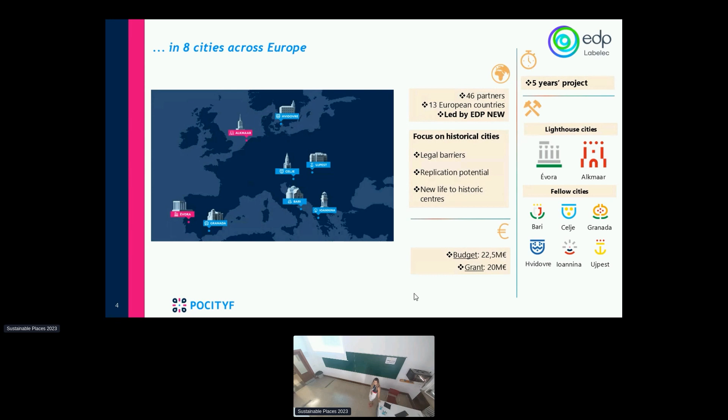So we focus on historical cities. We have legal barriers to overcome. Replication potential is our goal - we want everything we're doing in the project to continue after the project ends, and we want to improve the lifestyle of the citizens who live in these cities.

We have 5 different aspects: political, urbanistic, social, technological, and economic. Why political? Because we have a lot of legislation protecting the cities we work on, and we have to have a direct connection with the municipalities and with the laws, and we had a lot of discussions about the solutions we wanted to implement.

In the previous presentation I did this morning, I talked about building integrated photovoltaics, one of our main solutions - I didn't repeat that content here, but it's recorded if you want to see it. The community solar farm and building integrated photovoltaics are the 2 innovative elements in the project that will allow us to achieve positivity in these regions.

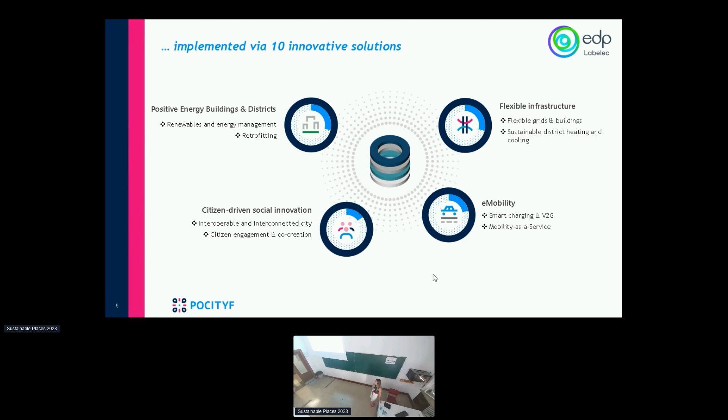We have all the solutions divided into 4 energy transition tracks. The first is positive energy buildings and districts, with home energy management systems, energy routers, smart inverters. We have flexible infrastructure, and we are testing the installation of second life batteries. There's citizen-driven social innovation through workshops - we organize workshops in Portugal and across Europe to make students aware of the problems we are facing now. And we have e-mobility through the installation of EV charging.

I will start with Évora, one of our lighthouse cities. Évora is a protected city with around 50,000 inhabitants, and it's the only Portuguese city that is a member of the oldest European city network. The historical center doesn't even allow citizens to install PV panels on their houses - that's why we want to implement a community solar farm outside the city, to decrease the disadvantage for someone living in the city center compared to others.

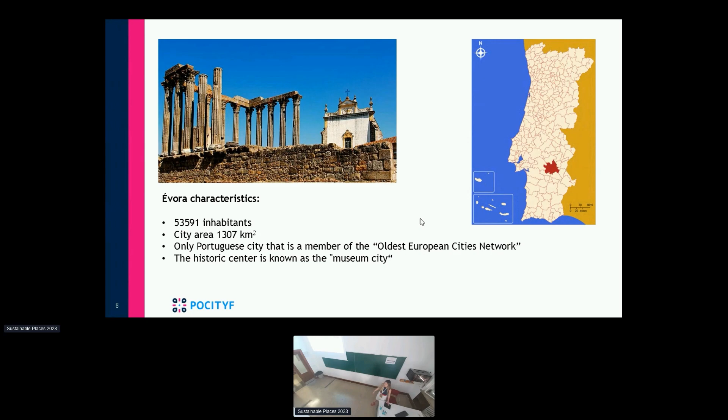We have 3 different paths, 3 different regions where we want to be positive: the city center, a rural area called Valverde, and the industrial park. In the city center, I think it's the most interesting path, and I believe the main takeaways of the project will come from this path because it's where we actually have the restrictions.

In Valverde, it's really easy in a way to implement an energy community because it's really small, all the houses are close to each other. In Portuguese legislation, there's a rule that says all houses inside the community need to be at a maximum distance of 2 kilometers, and this area, all the houses are inside that area, so it's easy in a way.

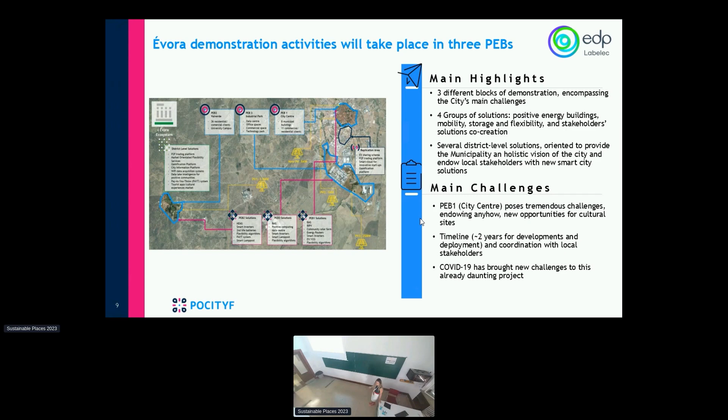In an industrial park, we have other challenges because we have companies with high production, so when we are talking about establishing energy communities, even though we are implementing a PV park in each one of those, we don't know yet if we will have a surplus of energy to exchange between the buildings. So this is the Évora pilot.

Now I will show some particular solutions that we are developing in the project. Home energy management systems are being developed by INESC TEC, a partner of the consortium, and this will allow data acquisition when connected to smart meters, and also a mobile app to allow citizens to visualize their data and be more aware of what they are consuming and producing.

These systems will be implemented in the 11 clients we have in the city center. These clients have PV panels because they installed before the legislation came out. So at the moment, a person who buys a house in the city center can no longer implement PV panels, but these ones were lucky because at that time they didn't have that restriction, so they are inside the project as well.

The pay-as-you-throw solution is being developed by a partner called Ubiwhere. This aims to change the behavior of the people. Nowadays in Portugal, we pay a tariff connected to waste that's included in the water tariff.

We are trying to install containers in the city center. Citizens will have a card and they will throw the waste there, so it's a way of making them, or forcing them, to recycle and decrease the amount of waste. They can gain points because of that, and in an optimal condition, they just pay for what they put in the containers. I think it's pretty interesting, and it has a lot of opportunities for gamification.

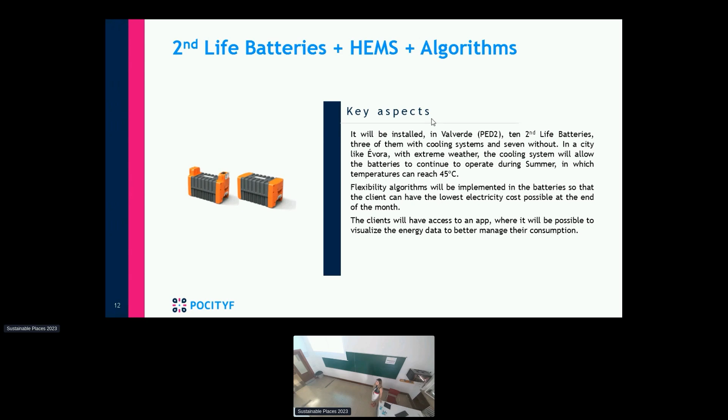The Tourist Mobile App is being developed by a partner called Uninova from Lisbon, and this will engage with tourists, making optimal routes for them to save time and visit the most interesting points in the city. This optimization will be based on the distance from one place to another, and also the time of the visits, so it can be as efficient as possible.

This will also be included in the gamification platform we are developing, so tourists can gain points and buy souvenirs from local stores in Évora. I think it's pretty interesting as well.

The second lighthouse city we have is Alkmaar in the Netherlands. Alkmaar is a little bit bigger than Évora, with approximately double the inhabitants, but it's much smaller. They are known for being sustainable, like the Netherlands as a whole is known for the projects they have. They have 17 provincial monuments, about 400 national monuments, 1,000 municipal monuments, and 32 windmills.

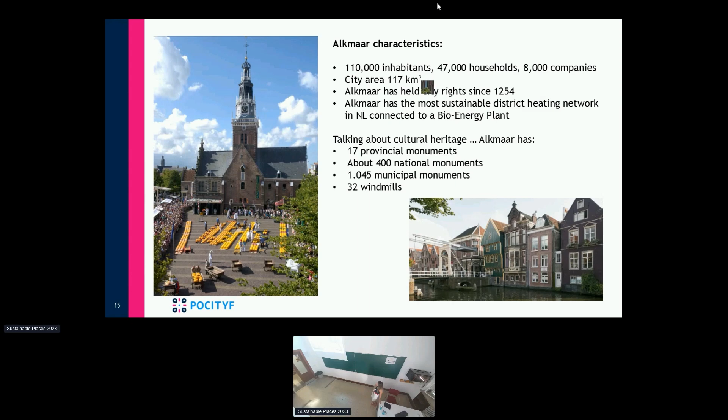So this is the picture of Alkmaar. They have 5 Pocityf energy blocks — I won't say the names because I don't know how to pronounce them in Dutch — but basically they are aiming to reach positivity as well in each of these 5 blocks, and they will show about 50 innovative elements. Most of them are really similar to Évora.

But actually, for example, the peer-to-peer solution I was talking about — we discovered that Alkmaar is having a lot of trouble implementing peer-to-peer because they have a net metering scheme, so they don't have any incentive to exchange electricity between houses.

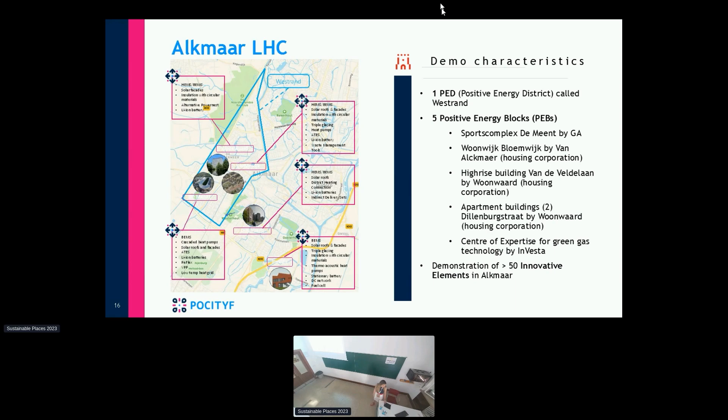So that's one of the solutions that I think we only showed in the Évora pilot. So De Meent is a sport complex that they have. They have a gym inside, an ice rink, and a really high energy consumption.

Before the Pocityf project, they already installed a lot of solar panels. With the project, they are hoping to change natural gas for heating with renewable sources. They want to increase renewable energy production, and they are changing the thermal energy system all over the building.

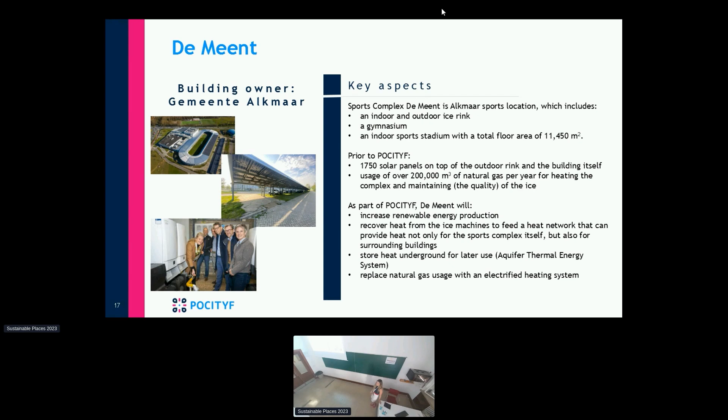with solar PV production. Alkmaar has not been visited yet, so the project started in 2019, and hopefully in September we will have a general assembly, and we will be able to see all of these solutions on the ground already. They have other non-building related innovative elements like the smart lamp posts.

They can use that for boats or for electrical vehicles. They have a noise barrier that actually has PV modules, so it's a solution with a double function. And they also are trying to implement hydrogen vehicles, I think mainly for buses.

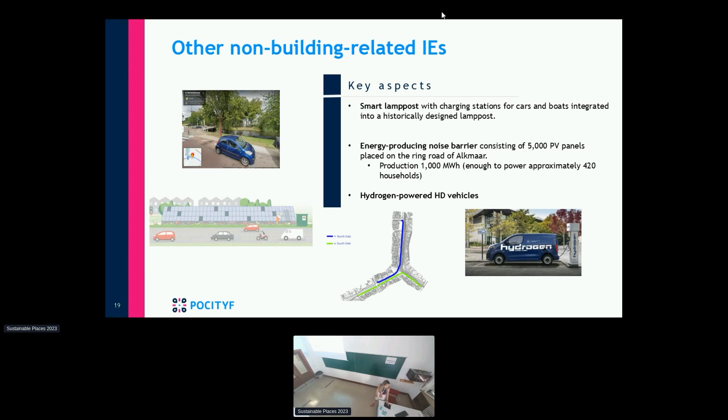This is a quote that the site manager from Alkmaar showed in the General Assembly. I thought it was really funny: there is no negative energy that resists positive people, because we try to be positive as well, working in the Pocityf project. So this is all from my side. Thank you very much. I don't know if you have any questions.

How do you manage to, I don't know if it's implemented already, but how do you think you can manage people to throw the waste in the bin and not just in front of the bin?

We are kind of forcing them because we are taking the others from there. But you could leave it just in front, so we are trying to trust people in that regard as well, because we believe that the people we are engaging want really to be part of the project. So your question is, how do we know if they are going to the smart bin or to the normal bin? In reality we don't know, but we are trying to choose the right people to be part of the project.

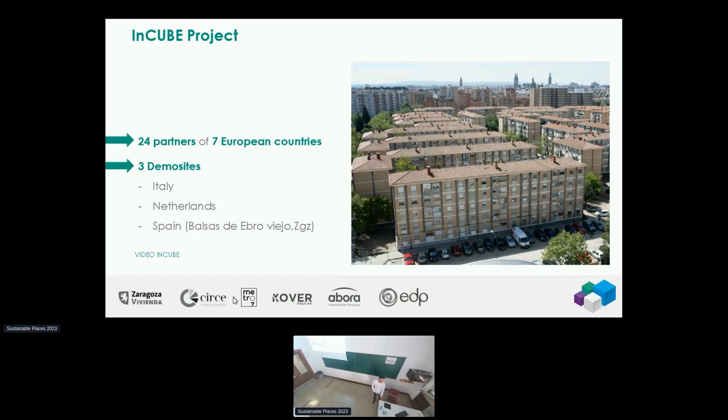We have some social networks and a website that you could visit in order to see how we are going in the project. And well, regarding the point we are at in this commitment of the inhabitants, we had the startup meeting in March, and we achieved some milestones.

For example, we ordered the technical documentation. We made agreements regarding the solution of the elevator, because as you could see before, the buildings are really old and don't have any accessibility measures for the inhabitants, who are also elderly people. So we are also working with the follow-up commission, sharing with them the progress of the project and compiling the documents for requesting some Next Generation funds.

So here you can see that we have done some follow-up commissions in order to have direct contact between neighborhoods and technicians. We select neighborhood representatives of the blocks to have a teamwork compilation of their suggestions and preferences in the buildings, which are later explained in detail to the rest of the neighborhood.

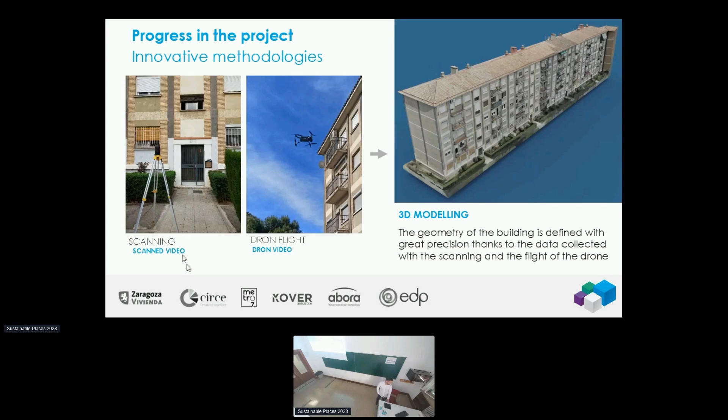Then when we go to the rehabilitation proposals, we have three main points. But right now I'm going to focus on the improvement of energy efficiency and also the improvement of accessibility, because it's part of the energy use of the district. I'm not going to center on the conservation improvement that can be made in the district as well.

So then we show them the new solution for the lift. We fold down the existing stair and develop a new block outside of the facade, with a stair line that has direct access to the buildings.

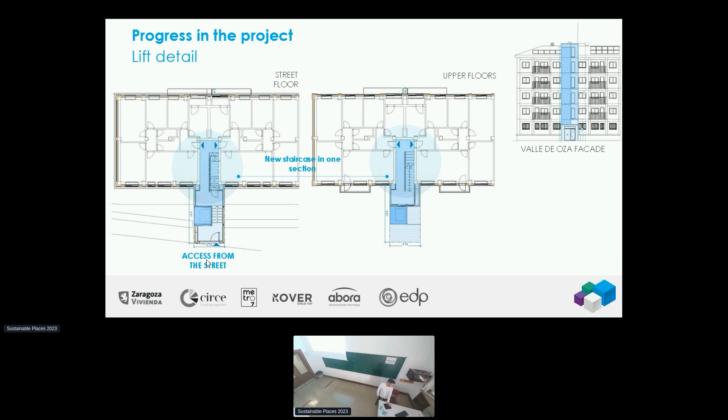Then we showed them some of the renders we have done in order to achieve their aesthetical requirements and decisions, because they have different decisions to make on the way we should carry out the rehabilitation works.

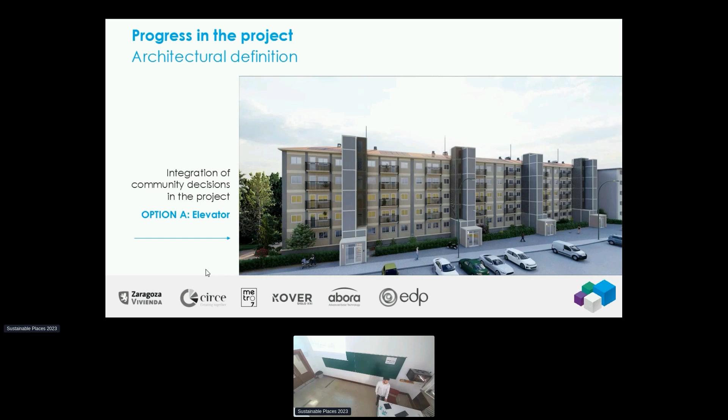So, as a next step, we have the presentation of the basic project to the Zaragoza City Council. Here we are going to review all the project in order to have their approval and to ensure the project complies with municipal regulations.

And also during summer, we're going to start with the monitoring of the existing stage to have future results, to compare how much the energy consumption has been reduced during this time. And by the end of summer, we expect to have the execution project ready to be executed.

So as for the elements we are applying to the building, first we have the prefab module facade. We wanted to show the inhabitants that we are not changing the aesthetic of the building, and we are trying to continue with the materiality and the original compositional lines that are part of the building. This is also a requirement from the city council, so we are aligned with that.

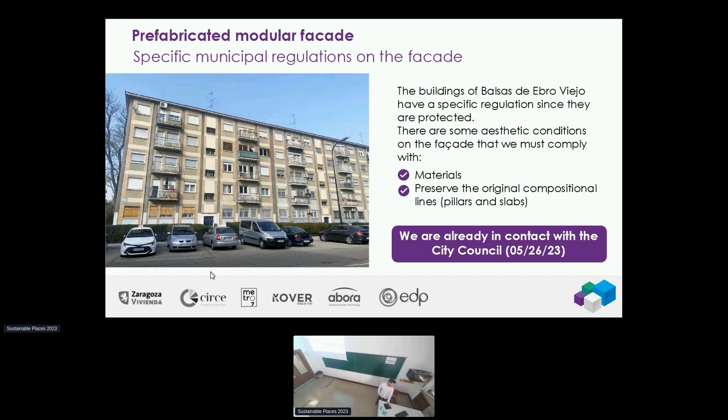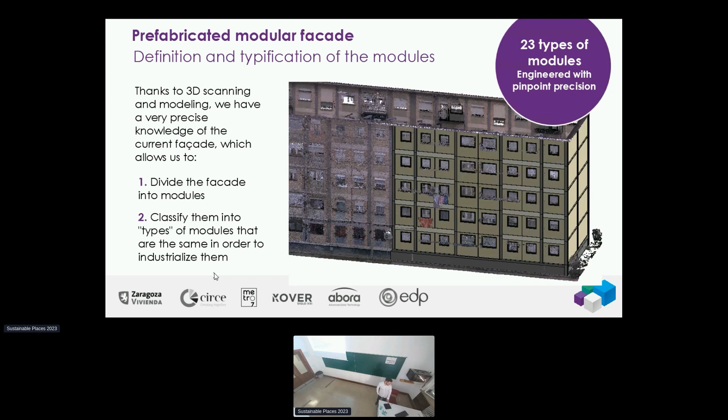And we also explained to them how the 3D scanning leads us to the correct development of the prefab elements and the different types being modeled with millimetric precision.

So then we showed them the different finishings, where the insulation has the best quality and is really an innovative product that is going to be really important for them, and also some prototypes that we have applied in the project.

Finally, in terms of the renewable energy solution, that's the one most important for us. We show them the electrical scheme of the dwellings: how 70% of the total number of panels is going to be photovoltaic, while 30% are going to be hybrid, combining electricity and domestic hot water. Then the electricity is going to be sent to the elevator and also to self-consumption of the homes, while the domestic hot water is going to be collected in a deposit and distributed equally to all homes.

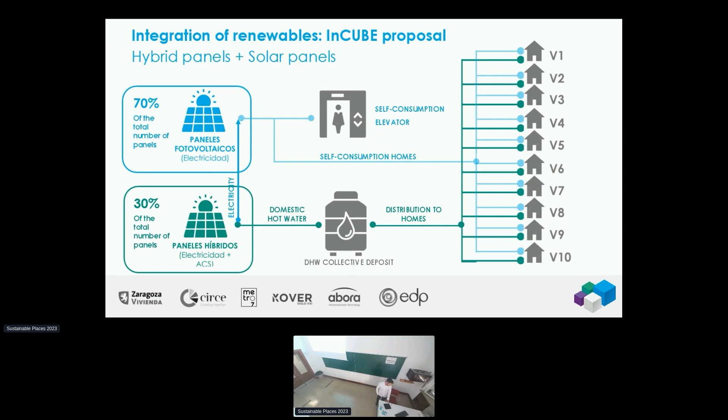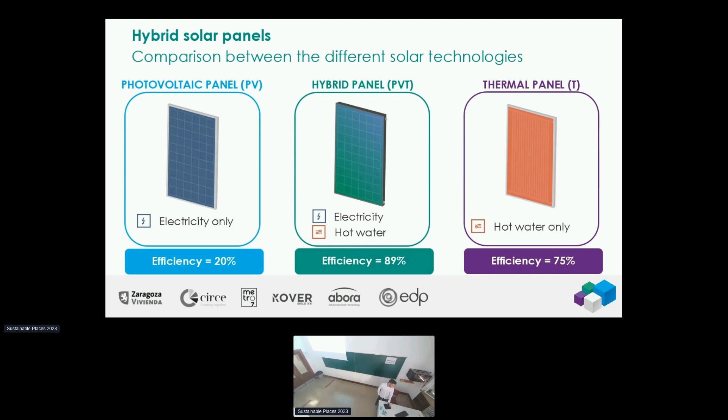So about the hybrid solar panel solution, they were really aware of it. We need to show them the differences between different types of panels, and what is the best efficiency model that is already in the market. It was really important to them to show these ratios because they were looking for the best production, of course.

And also some key benefits of these panels, like the double production, this premium quality that is made in Spain, so they were really happy with it. Also the greater savings and the less CO2 emissions in the production of them.

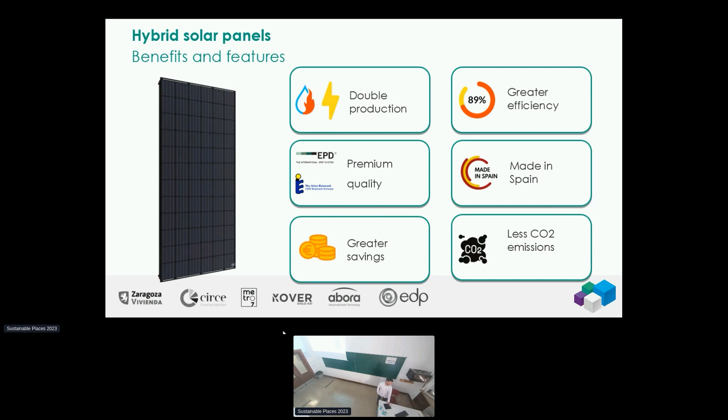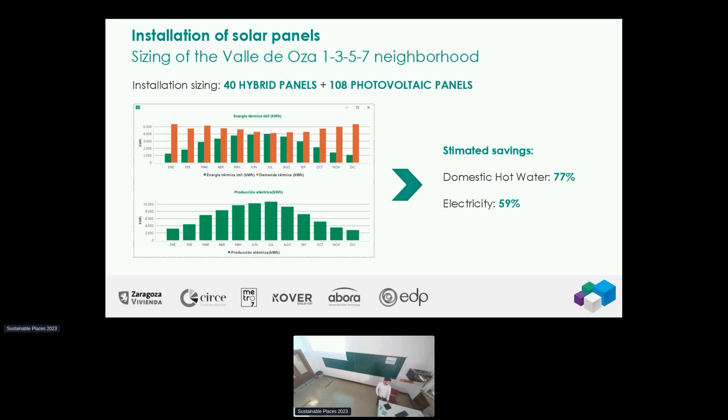But this is not really relevant unless you speak with them about the savings. So with this study, we expect to address a 77% reduction in domestic hot water consumption, and also about 59% in electricity.

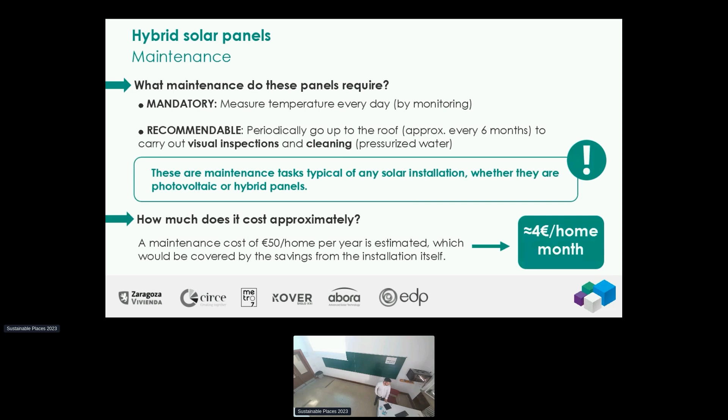In terms of maintenance, the temperature is measured every day, and it's also recommendable to go up to the roof and carry out visual inspection and cleaning. But it doesn't cost too much, about 4 euros per home a month.

So with it, we passed through the energy community. First of all, they didn't know exactly what an energy community was, so we needed to explain in a brief, simple way what it is, and that its objective is the benefit gained from a single solar energy generation installation.

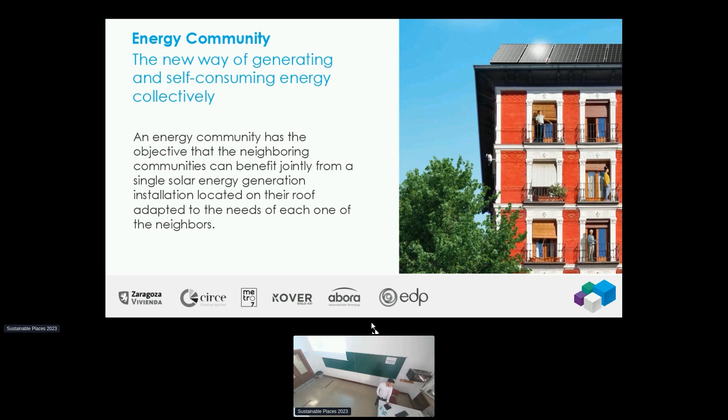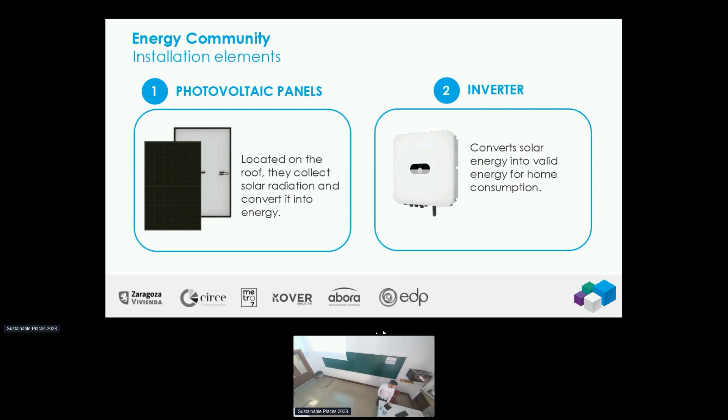Which are the elements that compose this installation: the photovoltaic panels and also the inverter. And then, what is the process with this consumption, from the energy capture to the self consumption, the disposal of surpluses, and then if it's not enough, we have the network energy consumption.

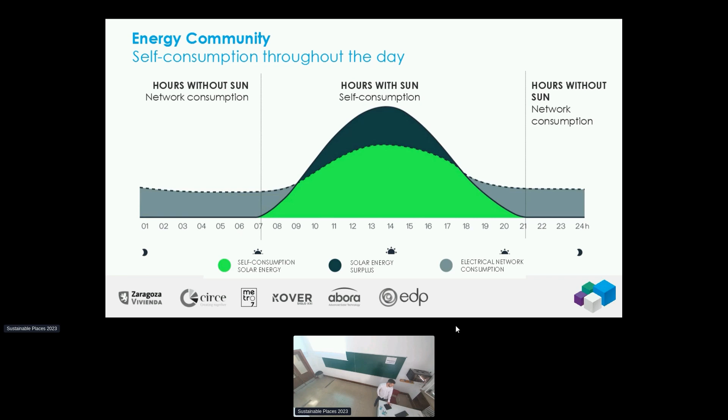This was really relevant for them, because they need to know what happens with the production when there is no sun. So we gave them this graphic where they could see that in the hours of sun they consume less than they produce, so they will benefit from them. And also in the hours without sun, they are going to consume from the network.

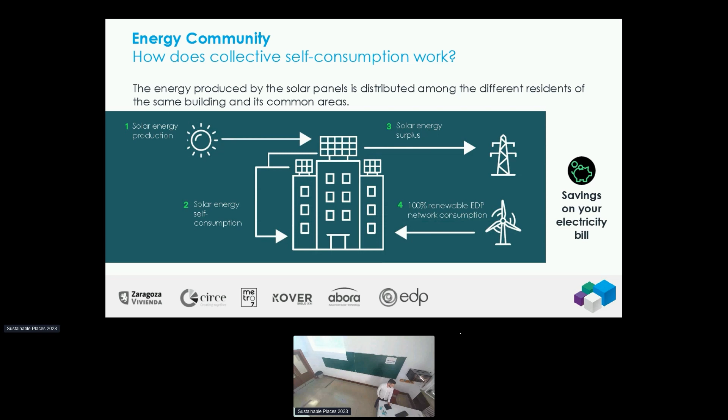Again, a simple schematic of the installation, and then we need to explain that this, for example, this elevator that's going to be applied in the building is not going to cost more maintenance for the inhabitants. So all the priority is given to this elevator consumption.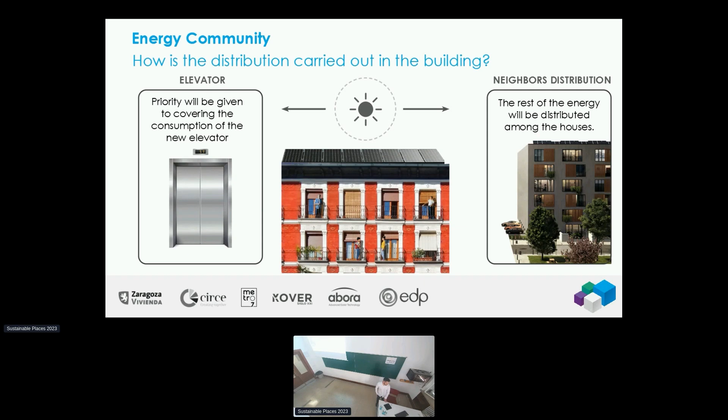And then the rest of the energy is distributed equally to all the houses, again with a schematic of this production. And then we need to say that...

They have the same percentage of the production, but the savings are not going to be the same because they have different circumstances. For example, the type of consumption, the individual heating and water system that they have in each house, and also the price at which each home pays for electricity, which is based on specific contracts.

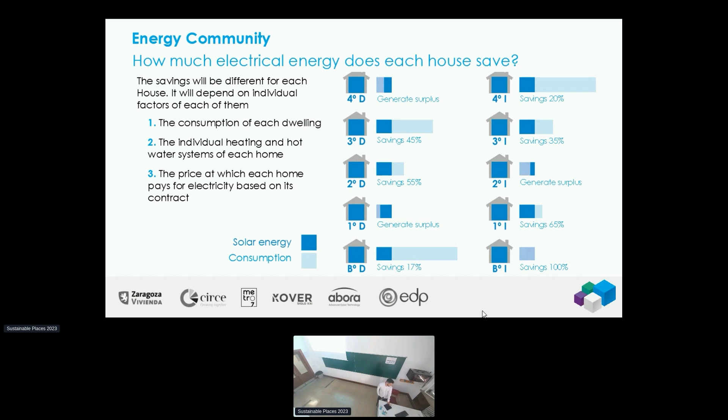So, for example, some portals will have surpluses, while others have less savings. Just as a conclusion, all the homes receive the same contribution, but the savings will be different, to be clear.

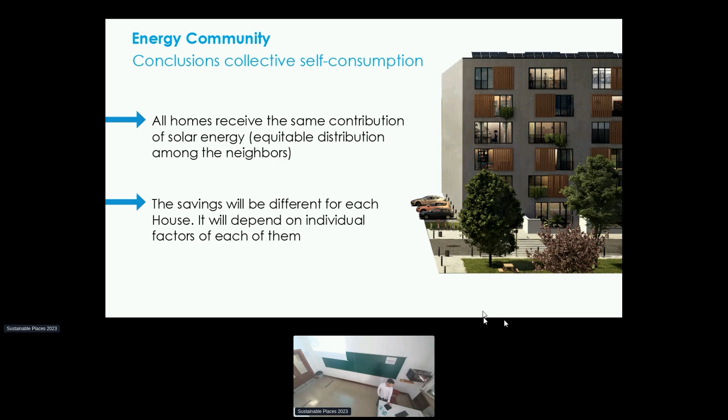And then we left the floor to the bill, where we could see how this production is going to be compensated in the electricity bill, and how the surpluses are going to be applied.

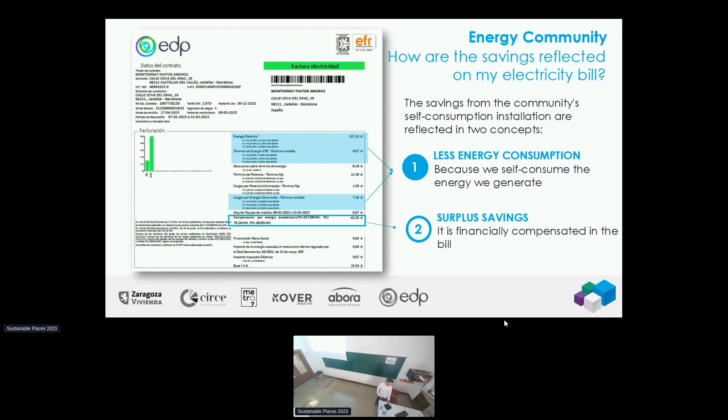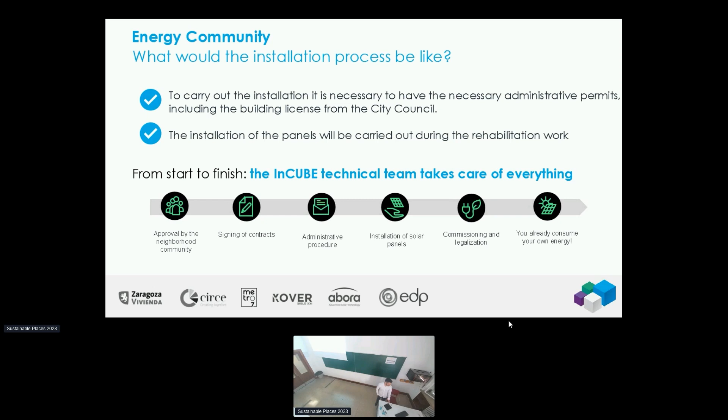Finally, we go through the process of installation, taking care of everything from start to finish, so they don't need to worry about anything. The INCUBE team will take care from the approval to the signing, administrative, installation, commissioning, and consumption.

Finally, we finish with some frequently asked questions that were really relevant in other follow-up commissions and stuff like that. And with it, we concluded their achievement, and we are going to develop this energy community in the near future. So thank you, everyone.

With the drones coming, you mentioned you made a model - was it a big model or just an image? No, a BIM model. We transferred this scan to a BIM model by a verification process. We started with it as a point cloud, and then we developed the 3D model.

Thank you, Danny. We can continue with another European project, a real project we are developing in 2 lighthouses, in Dijon and Turku cities. My colleague Eva will tell us a resume about the different innovations and the progress of the project. Please, Eva.

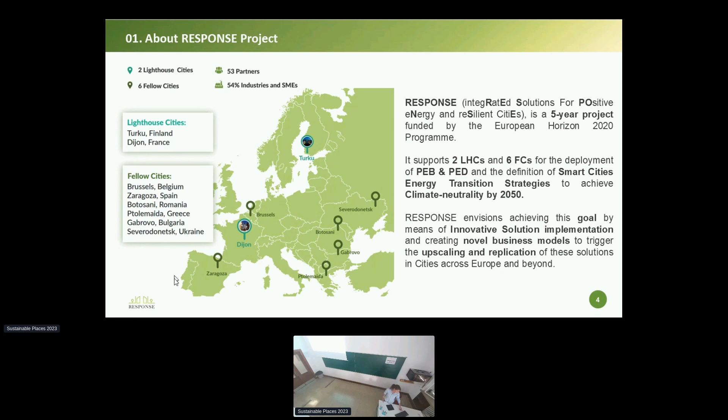The energy transition strategy the project proposes lies in 5 main pillars, or so-called transformation axes, shown in dark blue. These consist of 10 integrated solutions, and these 10 integrated solutions are composed of 93 innovative elements - different technologies, tools, and methods.

During the project, these elements have to be implemented in the lighthouse cities, in the different positive energy districts, and they also have to be measured, monitored, and evaluated by means of specific key performance indicators defined within the project as well.

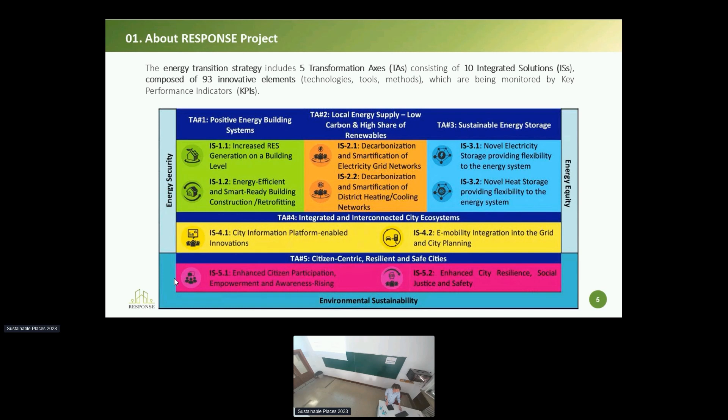So what about the lighthouse cities and the integrated solutions they have to implement throughout the project? As I commented, the two lighthouse cities are Dijon in France and Turku. The main objectives of these cities within the project are to significantly improve local renewable energy penetration, energy savings, reduction of emissions, and the demonstration of smart city solutions, promoting these solutions all over Europe or in other areas of the cities.

More specifically, what Dijon expects from the project: the city wants to create one positive energy district with 10 positive energy buildings and 6 positive car parks. They want to create smart city platforms based on digital technology to accelerate the energy transition, involve citizens to be committed to the goal of the project, and of course achieve the goal of carbon neutrality by 2050.

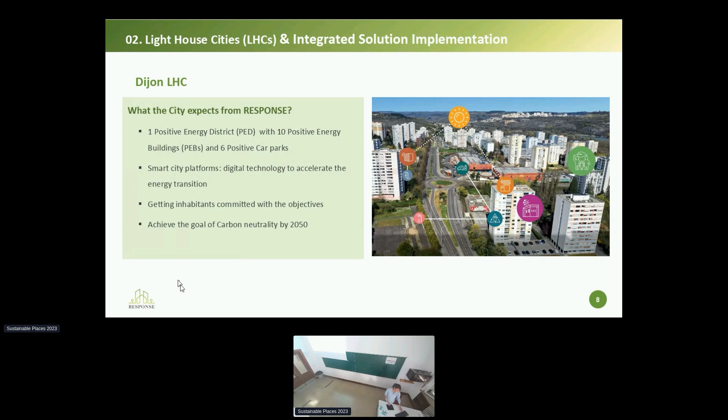Very similar in the case of Turku. They want to create one positive energy district with 5 positive energy buildings, increase the partnership between all the stakeholders, increase awareness of sustainable energy production and consumption, promote local replication in other areas of the city, and achieve the goal of carbon neutrality by 2050.

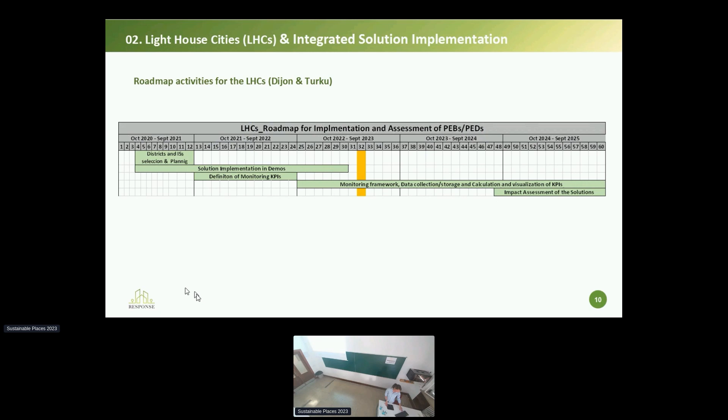Here is the timetable with the progress of the main activities these lighthouse cities have to conduct throughout the project. As you can see, we are right now halfway through the project, so some activities are finished, but others are in progress or not even started. I'll give you an update on the progress of these different activities.

Regarding the first activity, both cities have already defined or selected the most promising district to implement all the solutions.

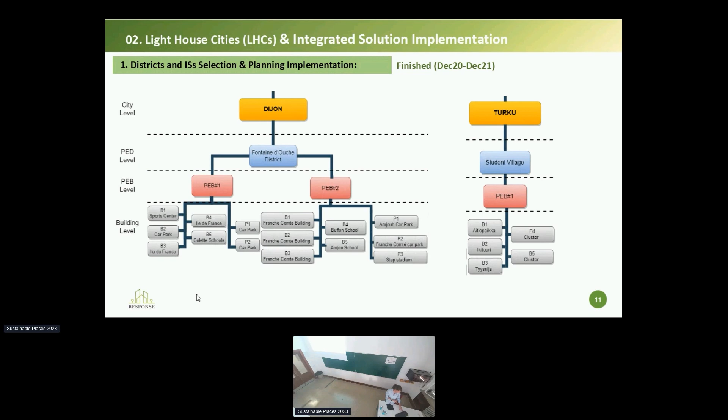In case of Dijon and Turku, this activity is finished, and the cities have also defined or selected the different innovative elements they want to implement in this demo within each one of the 5 transformation axes and innovative solutions.

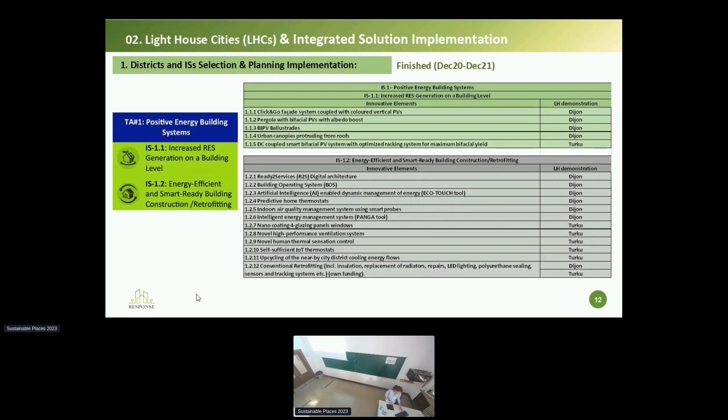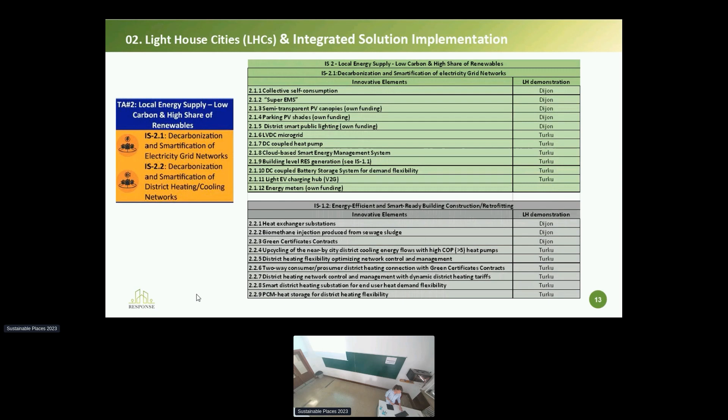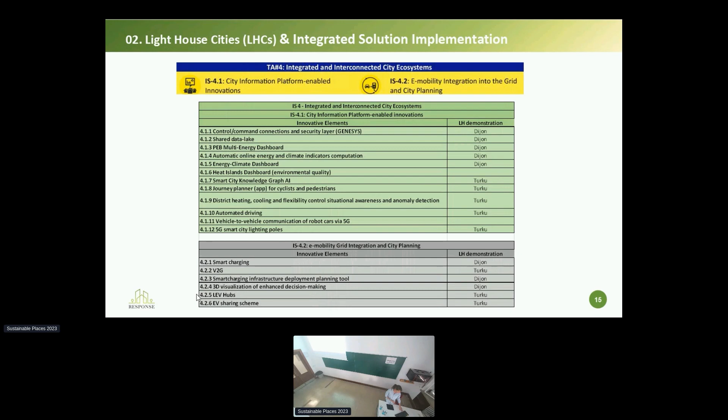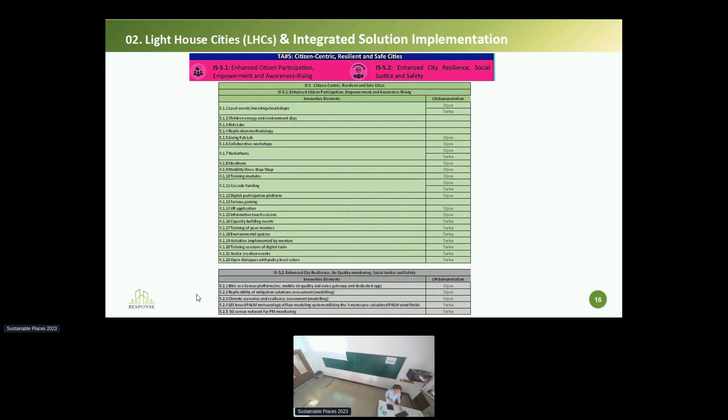Here you have the related ones about increasing the positive energy building systems, the ones related to improve the decarbonization of the local energy supply and improve the smartification of the grids, the ones promoting novel storage energy to provide flexibility in the energy systems, the ones related to the integration and interconnection, the creation of city information platforms or integration of electric mobility in the grid in the city, and finally the ones for promoting citizen participation and engagement, and the ones related to ensure city resilience, social justice, and safety.

So once the city has defined or selected the demo sites and the innovative elements interesting for being implemented, the next step is the implementation itself. This activity is almost finished. They are right now refining some installations, some things, but most of them are finished.

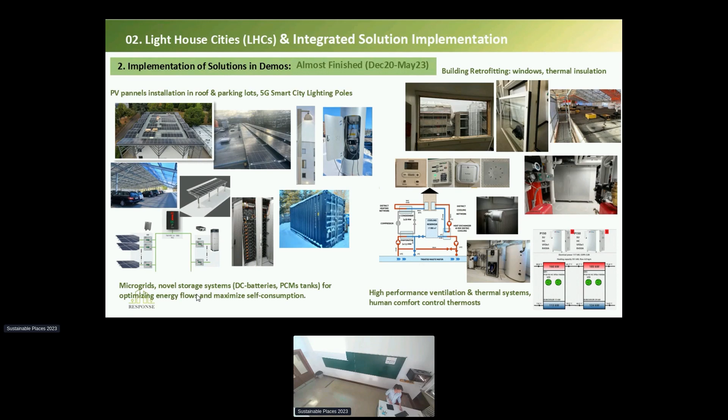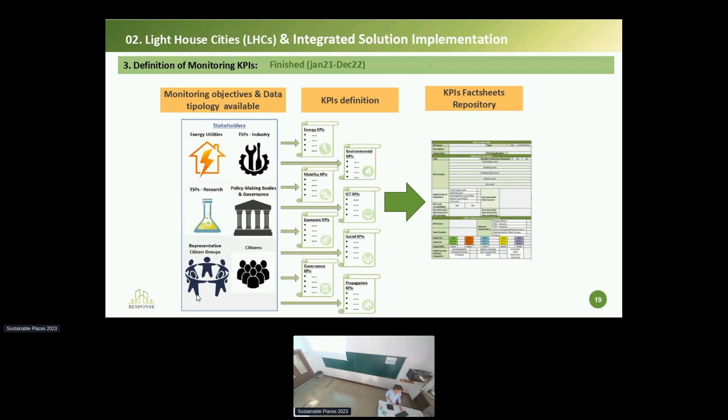And another activity finished, which has been done in parallel, is the definition of the more suitable KPIs, key performance indicators, to measure all the monitoring upcoming from this solution, to perform the achievements or the performance of this solution throughout the project. So based on the objectives of the monitoring and the kind of data available from this upcoming monitoring, these KPIs were defined, and also different fact sheets with all the information about how to calculate them, or the information required, and so on.

And the rest of the activities are still pending to be finished or to be started. For instance, the stage for conducting all the monitoring activities, creating all the framework for the collection of all the data from the different buildings or devices, establish all the calculation required for the KPIs, and the programming of the visualization dashboards for these KPIs. And both cities are working on this right now.

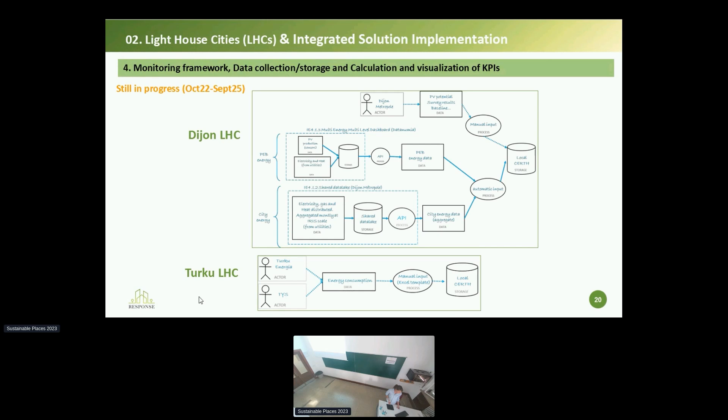And the final stage of the project, not started yet, will be the assessment or evaluation of all the results obtained with this monitoring and these KPIs, using or creating a methodology framework to evaluate the achievements of the project and the performance of this solution under 4 dimensions, not only technical, but also environmental, social, and financial.

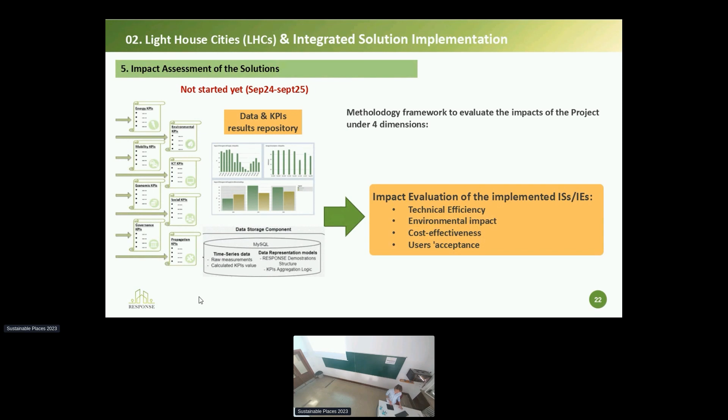What are the next steps for the fellow cities then? Continue with the monitoring and demonstration phase, consolidate the experience gained and lessons learned, evaluate the performance and achievements of the demos under the different innovative solutions implemented.

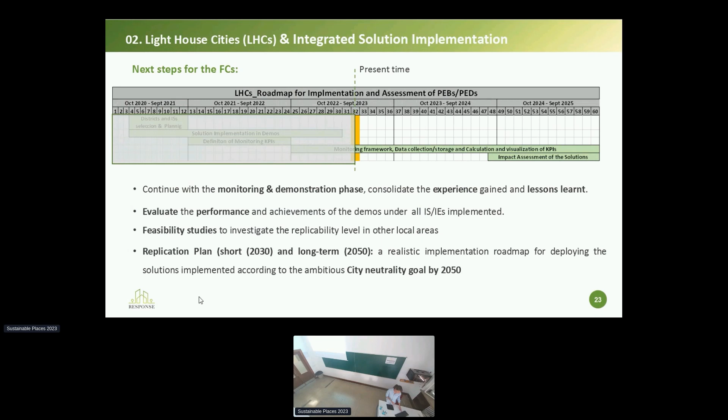Develop feasibility studies to investigate different areas suitable for replication in some other areas of the city or other cities within the country. And of course, establish or draw up the document with the master plan of the city for the replication in short and long term, in a realistic way, to deploy all of these solutions in different ways to get the city neutrality goal by 2050.

So what about the fellow city and its role? The activities are quite a bit different from the fellow cities compared to the lighthouse cities. In this case, they don't have to implement anything, but they have to conduct feasibility studies about how to make this real, their replication of this, or the most suitable solution within this context by 2050.

So the different fellow cities will have to conduct feasibility studies from technical, economical, social, and regulatory perspectives to identify the most suitable innovative solution in their case, based on the expertise of the lighthouse, but adapted to the local ecosystem according to the needs of the city.

They also have to identify the other potential districts for replication, identify the stakeholders, citizen participatory tools, and business models to conduct all of this, and draw up the document with all the explanation of the roadmap for the city to reach neutrality by 2050 and trigger the replication of these solutions.

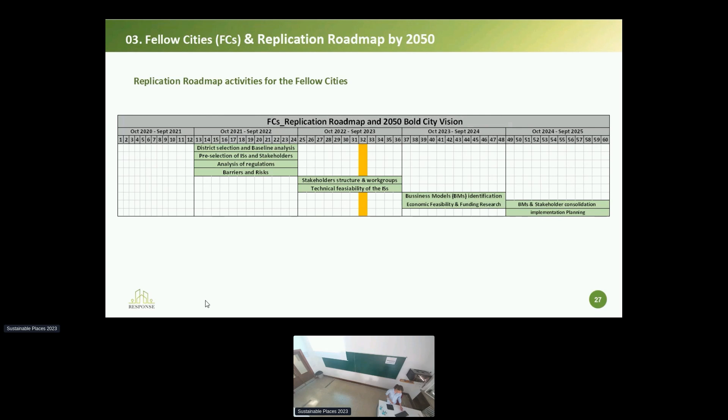So this is the timetable of the different activities. Some of them are finished, but others are pending to be finished or started. I would like to present the status of these activities in the case of Zaragoza.

The first activity is finished. The city has already defined the two most suitable positive energy districts to study implementation of solutions: Balsas de Ebro Viejo, a neighborhood built in the 60s with residents with very little social integration and economic resources. The city expects to transform this neighborhood into a positive one, retrofitted, as an example to replicate in other similar neighborhoods of the city.

The other positive energy district to study is Etopia Park, an underused area in the way of transit of hundreds of citizens. The city expects to transform it into a digital space interconnected with different parts of the city for citizen awareness and interaction.

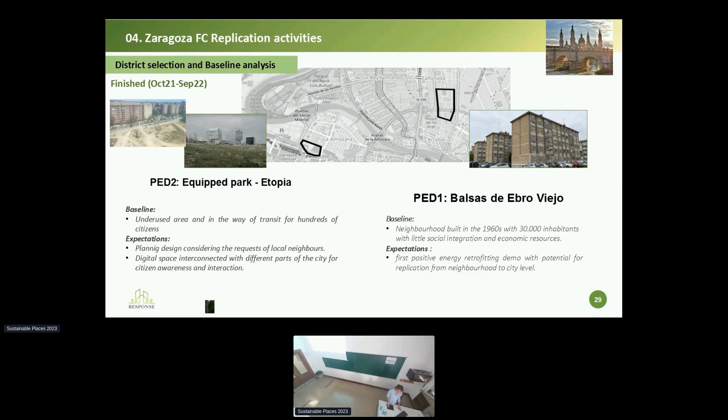Another activity finished in Zaragoza is the analysis of the local regulation readiness for solution implementation. The conclusion of this study was these four most suitable solutions for replication.

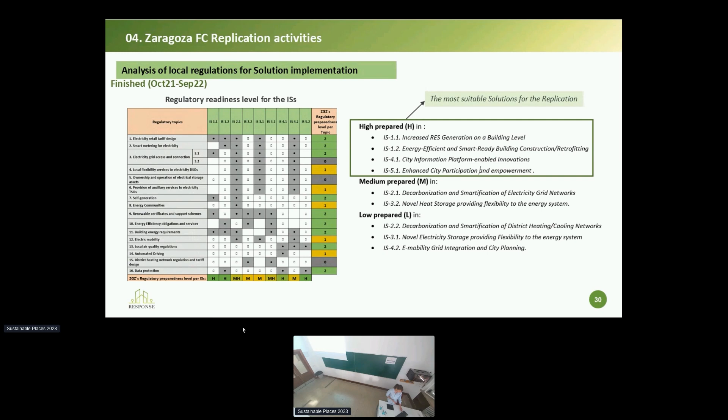The installation of renewable energies at building level, the implementation of smart-ready building construction solutions for retrofitting, creating city information platforms, and activities to enhance city participation and empowerment. Based on this conclusion, the city selected the most suitable ones for both PEDs selected.

And in the case of Etopia, the city is studying the installation of 5G smart city lighthouse poles and conducting different ideathons or co-creation events with citizens.

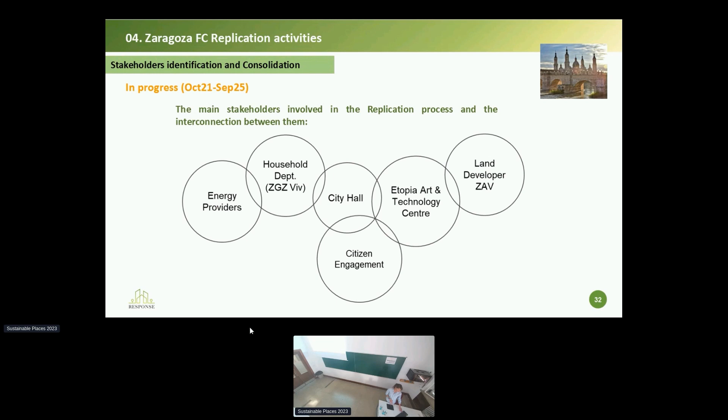The rest of the activities are in progress right now. Just some examples of the progress: the creation of the framework, the stakeholders involved in this replication, the relationship between them, and establishing the roles and economic communication.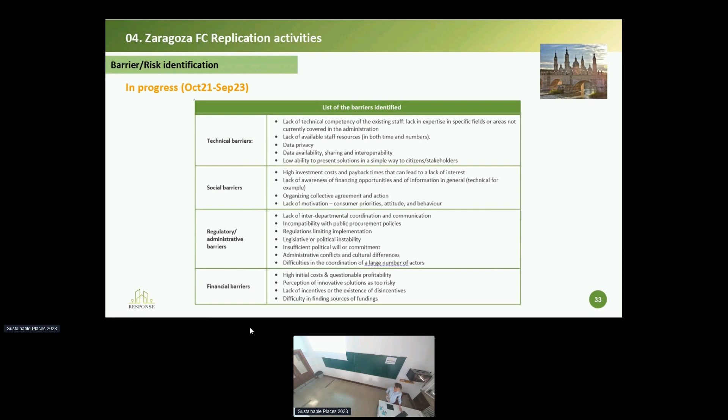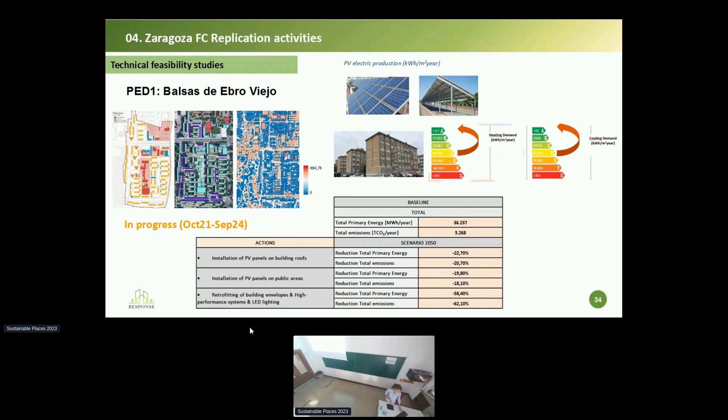Some feasibility studies are being conducted right now, but more need to be done from the economic point of view, not only technically, and for all solutions selected. Some workshops have been conducted so far, but more will be launched.

Regarding the next steps for Zaragoza: continue with feasibility studies for all innovative solutions for both PEDs, define the stakeholder structure and roles, consolidate communication between stakeholders, and conduct more citizen events on climate and energy issues.

Start working on how to define novel business models integrating technical, economic, and social approaches, explore new funding opportunities to make the implementation real, and finally draw up the document with the master plan for the city's replication roadmap by 2050.

So this is all I want to present you today. If you have some questions or comments you want to express, you are welcome.

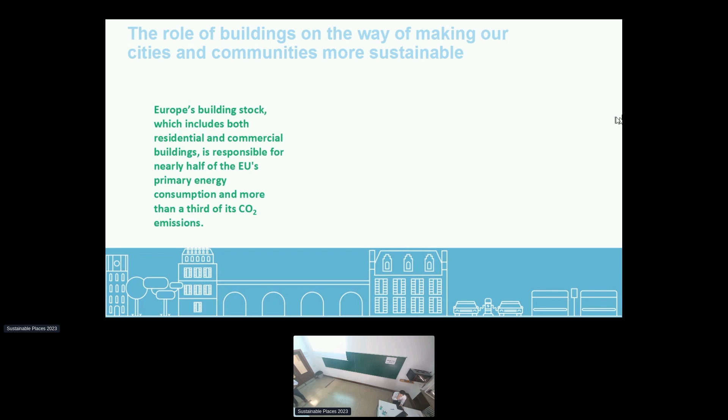We are all aware about the role of buildings at European level. Residential and commercial buildings have a bigger responsibility in terms of energy consumption and CO2 emissions at European level. In the European Union there are a lot of regulations and environmental goals to put the focus on reducing consumption and direct related CO2 emissions, but in some ways they forget the last part, which is the indirect emissions. The priority right now is to refurbish existing buildings, to reduce consumption and direct emissions.

There is also a focus on positive energy buildings, those which for sure produce more energy than they consume. But in this case we are going a little step further, adding CO2 emissions. In the next slide, the focus is on an ideal building, the life cycle zero energy building, which means it is neutral during the whole life cycle in terms of energy.

If we compare the annual energy use on this axis and the embodied energy on this other one, we can find on the top the typical buildings right now, buildings that need more energy in comparison to the embodied energy.

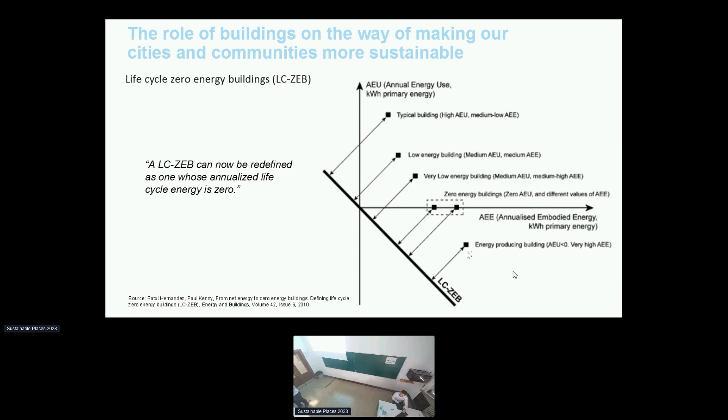If we go in that direction, there are a lot of indirect assumptions and topics we should address, which is in the next slide: the production of materials.

Now we are thinking, if we are going to increase the embodied energy, at least we need to use low energy and carbon materials. At least we need the energy and material consumption during construction to be lower than traditional ones. So we are putting the focus on the construction process, drones, ICT, and so on.

We are putting all the efforts on refurbishment, because we need to refurbish more than we need to construct new buildings, and on the use of necessary natural resources. So we are moving in this energy transition from fossil fuels to renewable energy ones, in terms of the use of energy for the production of materials and, for sure, the consumption of buildings.

So new concepts arise from this reflection, which is reuse and recycling. Let's put the focus on eco-design, let's design the products thinking of the end of life. To minimize all the transportation, let's use local products as much as we can, promoting the use of resources in local areas. So the next slide puts a focus on that.

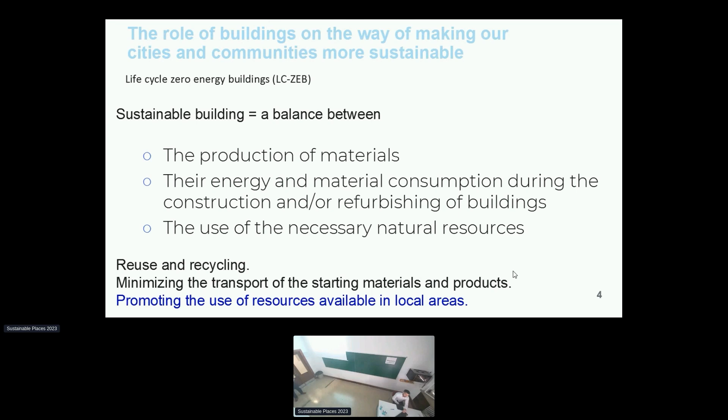Life cycle thinking approach not only puts the focus on the use phase, which is to reduce energy consumption or to produce more energy, but also puts the focus on the other stages: production, construction, and the end of life.

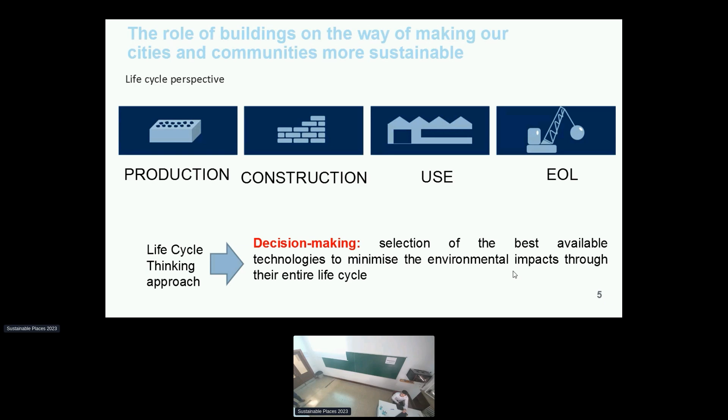This is an exercise we are doing in a European project called Rinno. Rinno puts the focus on the refurbishment of buildings, low carbon emissions embodied in the production process of retrofitting, planning and design, putting in sensors and monitoring to reduce energy consumption in this process, and working with all the key stakeholders to make them part of the refurbishment. But this is a good solution, we need to go further.

This is the case of Neutralpath, the next one, which is more focused on a specific concept. We need positive energy districts, but we need positive clean energy districts, which is the big concept there.

The clean one - now we are talking not about PEDs, but PCEDs, because we have the clean concept. The next one: we want to be a district which is participative and human-centered, thinking about the real necessities of the inhabitants. And for sure we need to be cost-effective and feasible in terms of solutions that are going to be installed in the districts. Finally, in one direction, which is climate neutrality.

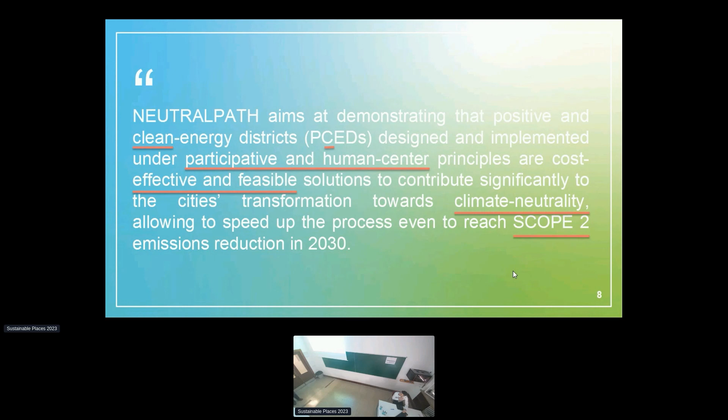Climate neutrality, as I said, includes not only scope 2, which is directly related to emissions in the European Union - the next slide puts the focus on climate neutrality. They selected a hundred cities around the European Union to reach climate neutrality by 2030. It's very ambitious. Zaragoza and Dresden, which are part of this project, have this goal.

They are setting a climate city contract. The climate city contract includes this goal, but also includes the goal to be an example to those cities that are not included, to be emissions neutral by 2050. So this is a very ambitious goal, and a way to reach it is part of Neutralpath.

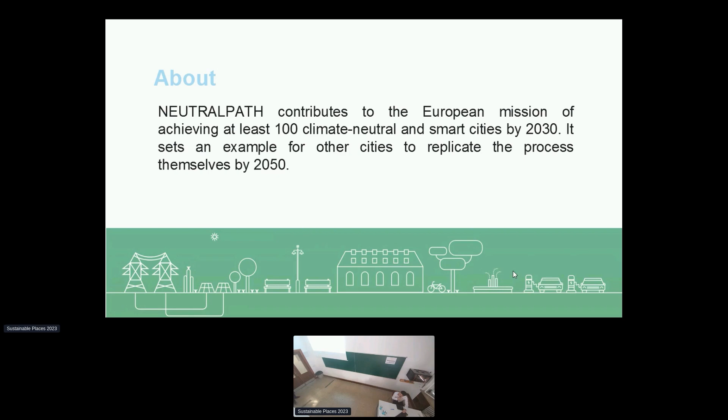In this case, we are working with Zaragoza and Dresden, both cities in the cities mission, but we have some followers in the same response group - you can see here Istanbul, Ghent, Vantaa - that will promote the different solutions we will test in Zaragoza and Dresden, and they will design those PCEDs to promote climate neutrality at the city level.

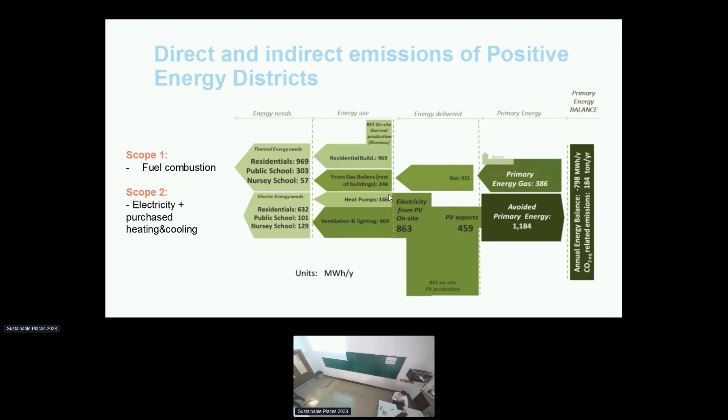But the idea is to pass from this, which is the more common balance in terms of energy including those emissions, to going further - just having a recap of this image. If we want to go further here, we want to produce more than we are using. We need to include those indirect categories if we want to go further into scope 3.

So this is very interesting when you want to have the balance in terms of CO2 emissions. You can use urban mobility to reduce these avoided emissions. In this case, just to summarize with some conclusions.

The first one: we need to work on the LCA of products, not only on the carbon footprint, which is nice - life cycle assessment of products in terms of CO2 emissions - but also going further with environmental product declarations. Environmental product declarations will give us the picture of our products to play in this game. So for those producers, environmental product declarations should be mandatory if you want to play in this kind of projects.

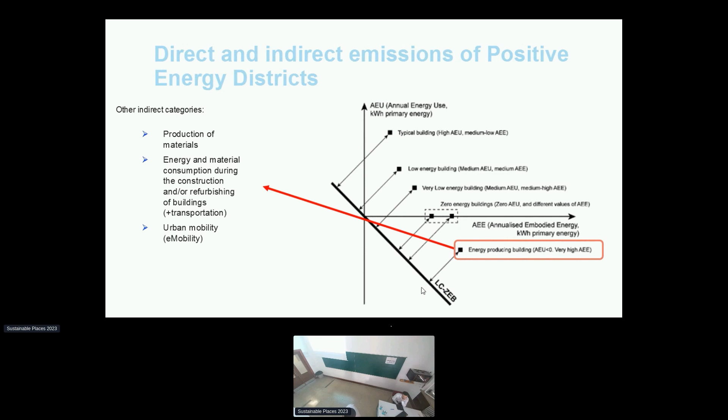There is some insulation needed in the basement too. We are not going to act inside the houses, because it would be great to put radiant floors at least, and change to aerothermal energy. But at this level, we are working to first try to reduce as much as possible the energy demand, and then proceed with the positive solution.

Okay, and you will be able to have the data from the first phase and the data from the second phase? Yeah, we are now in the design of the refurbishment, and the second phase will be how the positive energy district works. This is mandatory for the project, and from the proposal phase we need to work on reducing the demand of the building. So this is the first part.